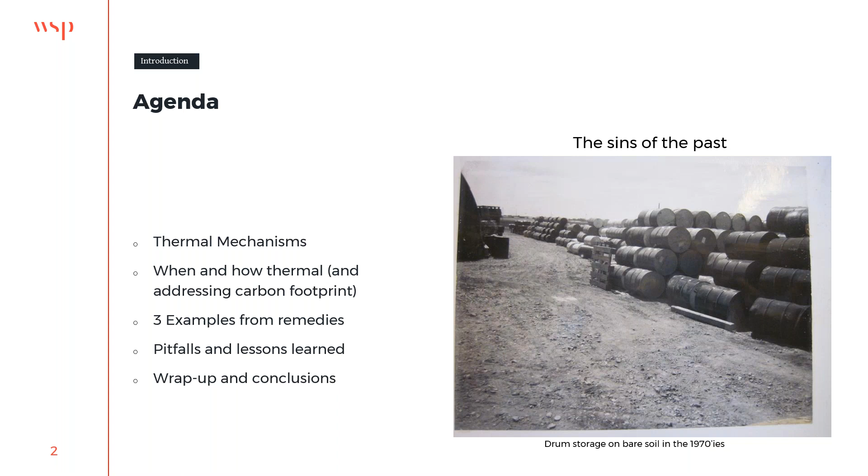What we are dealing with is what you can see to the right side here, a sins of the past. This is a drum storage on bare soil that was carried out in the 70s, and actually a thermal remedy was carried out at that particular site. In Denmark, we rely totally on groundwater for our drinking water supply, so we have relatively strict guidelines related to what we have to achieve doing the remedies. That's one of the reasons why we are using these techniques.

Just a short introduction here for those of you who are not familiar with thermal remedy. To the right we have a small sketch, and we have some kind of system that we'll go through in a minute, where we can inject energy into the soil, and then we have an extraction system that extracts vapors and liquids from there.

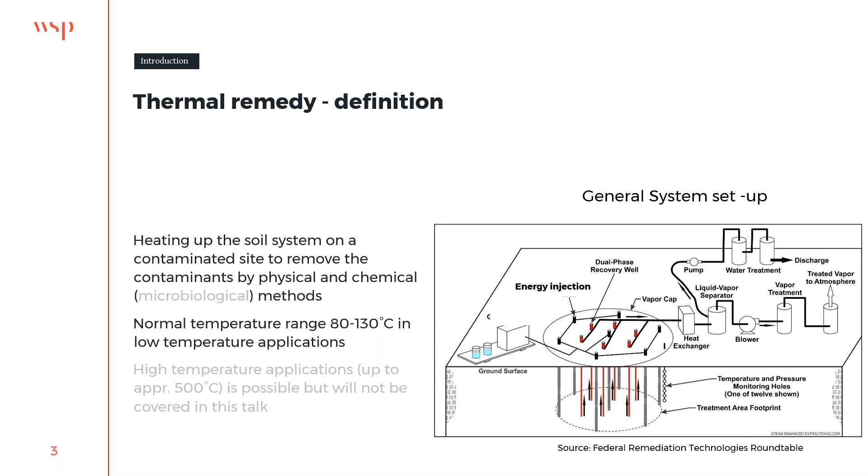That is run through a heat exchanger, as you can see, and liquid and vapor are separated from each other, and then the vapors are treated and the water is treated before discharge either into the sewer system or into the atmosphere. Normally the cleaning method we use here in Denmark is granular activated carbon in carbon vessels. The temperature regime we work at when treating chlorinated solvents is around 100 degrees C, as you will see in a short moment.

There are a lot of mechanisms that act positively when you're heating up the soil, and all of them tend to get the compounds from the sorbed or liquid phase into the gas phase, thereby making it possible to extract them with a vacuum system.

I should emphasize especially the steam drive, point number 5 on this list, because if you want to go to sub-ppm levels, you have to be sure that all the soil you're treating is boiling. The steam drive is caused by the fact that when water expands from liquid to steam it increases in volume by about 1700 times, thereby creating pathways for the gas to get up to the surface and be removed by our extraction system.

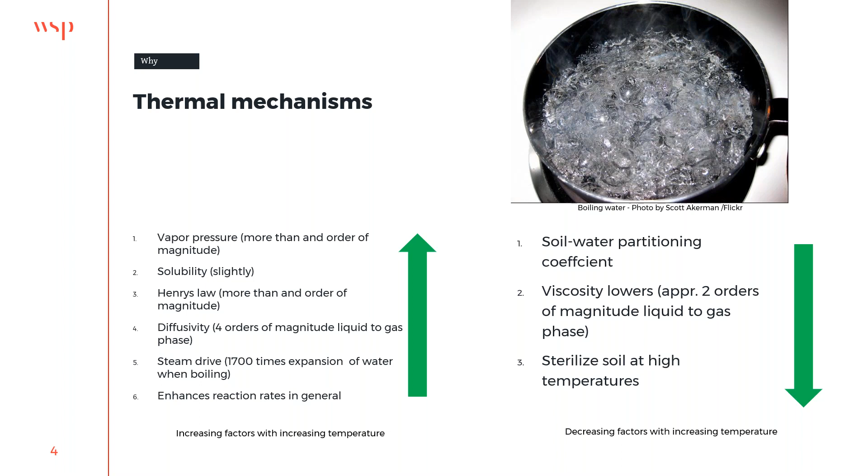So when are we using thermal? It's always only in the source zones, and here in Denmark it's relatively cheap to excavate and treat offsite. So the only places where it's economically feasible compared to other relevant techniques is typically below buildings or other valuable infrastructure, and if the contamination is deep - by that I mean more than 10 meters down into the soil.

It can be used in a lot of different settings, as I will show you some examples of in the next couple of slides, and it can be used either if there's free phase or high concentrations in the soil. It can be used both in saturated and vadose zones, and it can be used for a lot of compounds in this type of application, up to around 150 degrees boiling point.

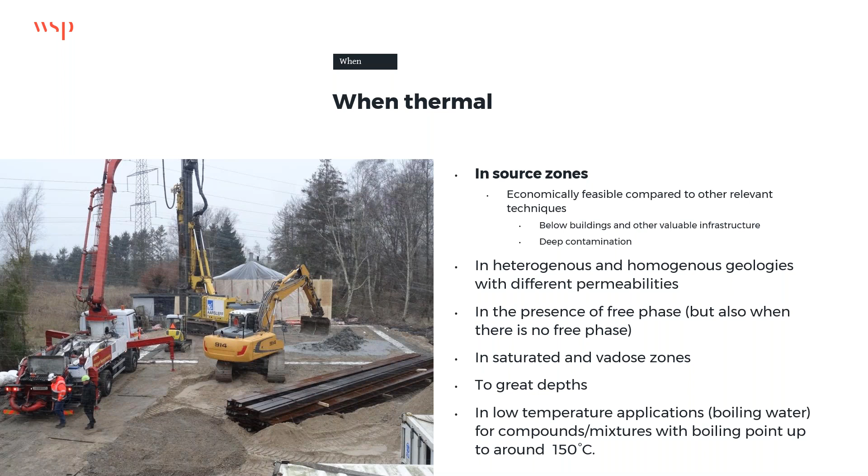The normal three different methods that we have at our hand are injection of steam, electrical resistance heating, and thermal conductive heating. I'll show you an example of each of these techniques in the remedies I'll show you in a couple of moments.

In order to be sustainable, we have to think about that, and one way is to use biogas, wind, or solar power for these energy sources. But another thing that is very important to keep in mind is that we have to reuse as much of the steel equipment that we normally use, to reduce the carbon footprint.

The little graph inserted there shows how much energy we normally have to apply from a theoretical standpoint, and if the soil is very wet, it's somewhere between 150 to 300 kilowatt hours per cubic meter.

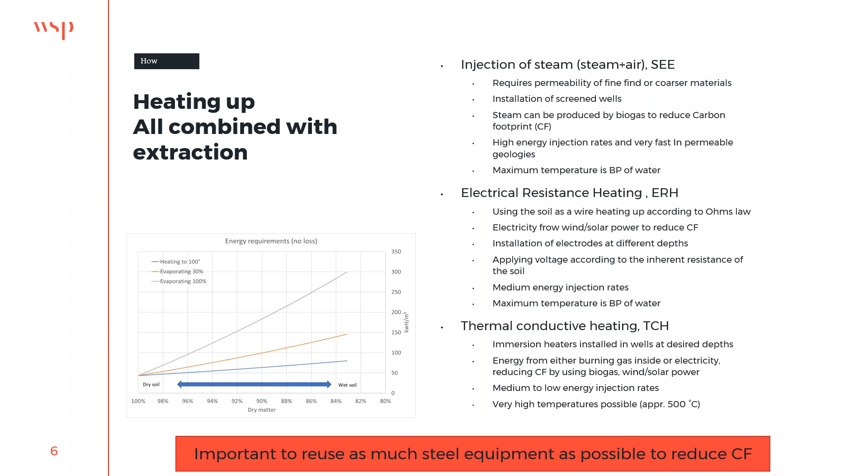Then I'll show you some examples that we have been involved in one way or another. The first one is the oldest, where we used steam enhanced extraction, and it was a contamination with PCE that originated from a former dry cleaner.

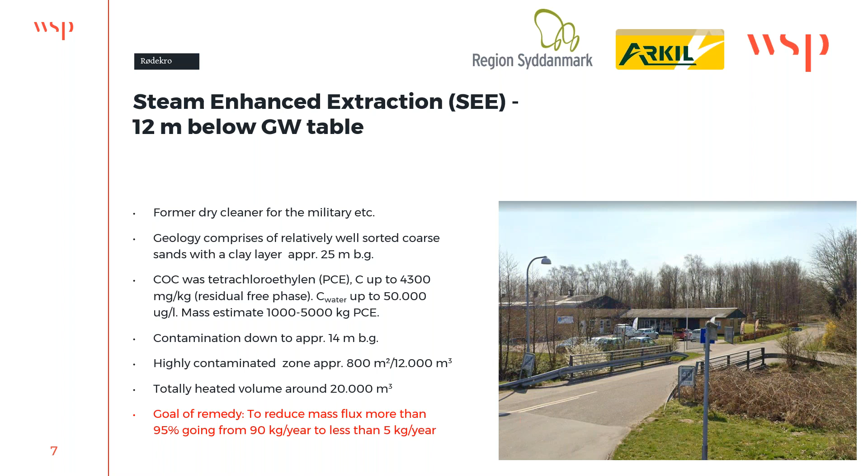At this particular site, the geology is relatively well sorted coarse sands, and the groundwater velocity was around 100 meters per year, with contamination down to approximately 14 meters below ground. The highly contaminated zone we had to treat was around 800 square meters. The goal of the remedy was to reduce the mass flux more than 95%, going from approximately 90 kilos per year to less than 5 kilos per year.

The setup at the site included 10 injection wells with steam and steam air, and a lot of wells for hydraulic control, vapor extraction, and so on. The main parameter we monitor when doing these remedies is temperature, and these are plots of the temperature wells. We also measured the extracted gas and water flow, and so on.

In this particular case, the control point was a transect placed down gradient of the contaminated site, which we sampled before doing the treatment and after, as I'll show you in some slides.

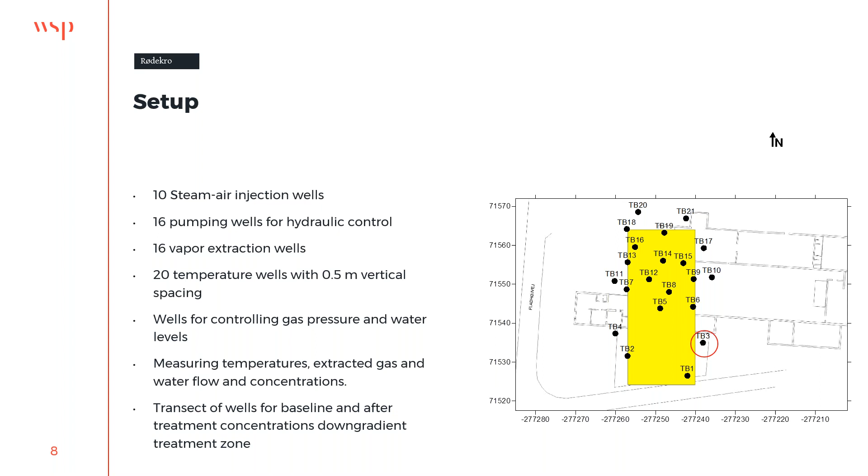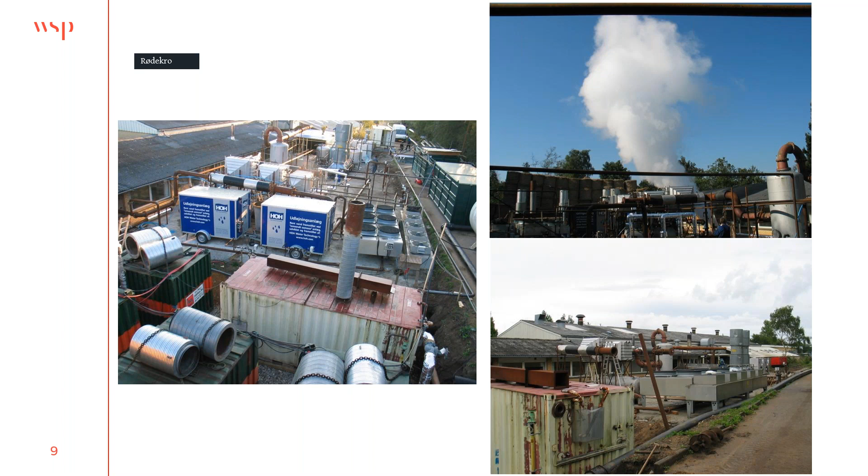Just before we go into the temperature data, here are a couple of pictures taken at the site. As you can see, the footprint of such an operation is relatively large, because you need treatment for water going into the boilers to make steam, a lot of cooling equipment, and separators and vessels for carbon, pumps, and so on. So this has a major footprint in this case.

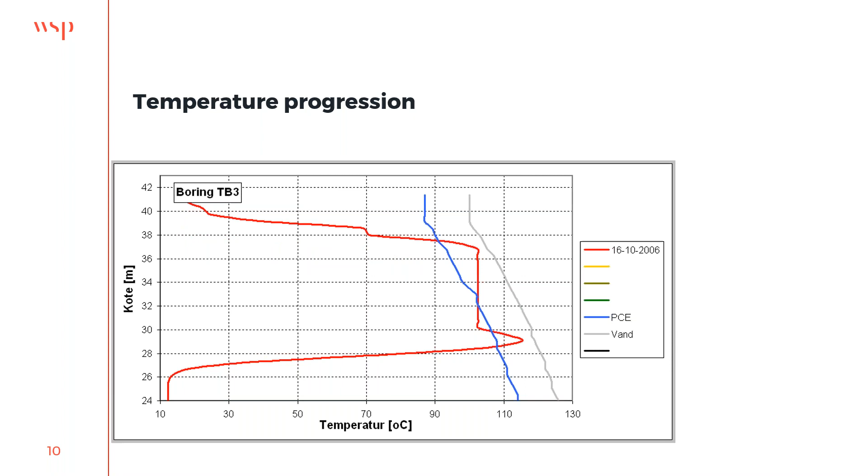As you go deeper in the groundwater, when the curve tends to the right, the boiling point increases, and at level 24 it's approximately 125 degrees. The red line is the temperature actually measured at this point on different dates as it progresses. When the temperature is above the blue line, we are sure there is no more free phase left in the soil. If you want to reach sub-ppm levels, you have to be sure the temperature is above or at the boiling point of water. As you may have seen earlier, the temperature reached that point over time.

The results at this site were that we removed somewhere between 1.5 and 2 tons of chlorinated solvents, depending a little on the method of calculation used. But what you should take special note of is how short the heating period was—25 days—due to the fact that we can inject a lot of energy into the soil using steam. We achieved the mass flux goal after 6 months.

The interesting thing is that we came back some years later, in 2014, and the mass flux reduction was even higher due to the fact that the rest of the contamination was almost gone. As you can see, it was 99% or maybe even higher reduction.

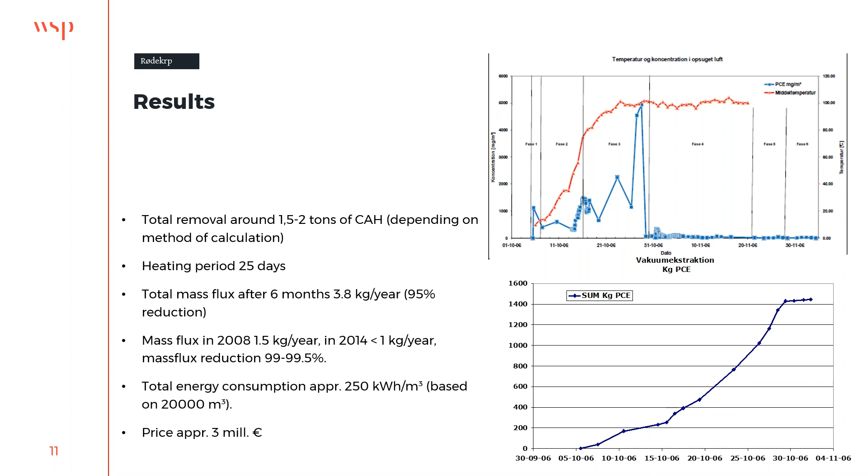This technique is rather violent, and you will see very high concentrations when the temperature increases to around 100 degrees, as you can see in the upper graph there.

This is a setup in an unsaturated glacial till. Here the contaminant was also PCE, originating from fur treatment in the building you can see in front of the church in this old picture. The installation was around 147 heater wells, much more than you saw before on the other site. So we have a much denser network of injection points, due to the fact that the amount of energy we can inject using this technique is much less per well.

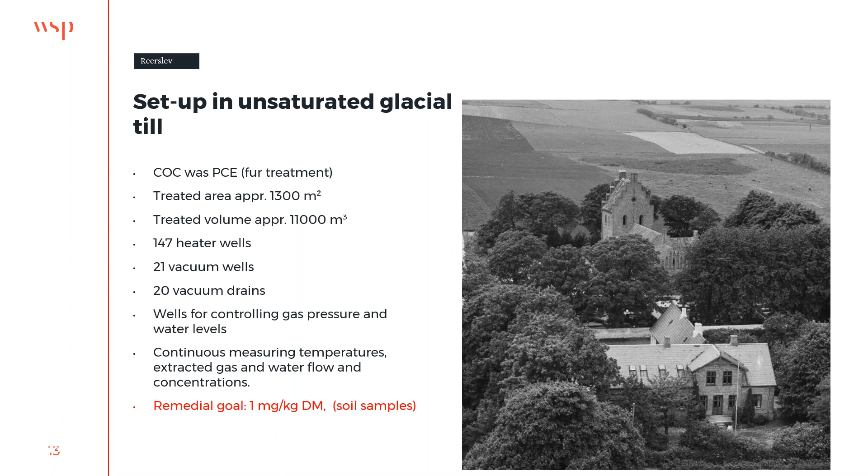At this particular case, they did a lot of continuous measurement of temperatures. It was carried out approximately 7-8 years later than the other one I showed you before, so the technology developed during that period. The remedial goal here was to clean up to 1 milligram per kilo in the soil, based on soil samples. So that was another way to do it.

The results: they removed in fact 2.5 tons of PCE. And as you can see, the heating time was much longer, and it's a more gentle curve that we see in the concentration in the upper part of the graph. The heating time at that particular site was 169 days.

In the bottom right, you can see the values taken from the soil samples. The red dots are the baseline before the remedy, the blue dots were taken just after the remedy was finished, and the green dots were taken approximately 2 years after the treatment. The criteria is the dimmed gray line, and as you can see, all sample points obey the criteria.

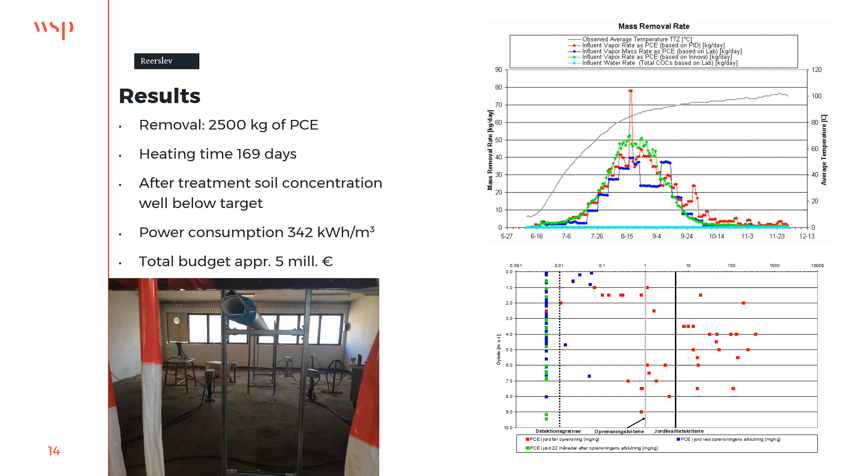The insert picture there is just another example, the same as you saw on the front page. In this particular case, it was also the groundwater that was the reason why we did the remedy, but there was a residential building, and we solved a vapor intrusion problem there too at that particular site.

The last example I'm going to show you is a remedy that was finished last year, and at that particular site we used electrical resistance heating. It was also carried out for the capital region of Denmark, and Geo was the contractor out there.

This was a setup performed in a saturated glacial till, whereas the other one I showed you before was unsaturated. It was TCE that was the contaminant of concern, originating from the military - it's actually an old Air Force base. The area treated was relatively small, around 500 to 600 square meters, and we had 53 combined heater extraction wells there. So it's more or less comparable to what you saw before in the density of wells for injection of heat.

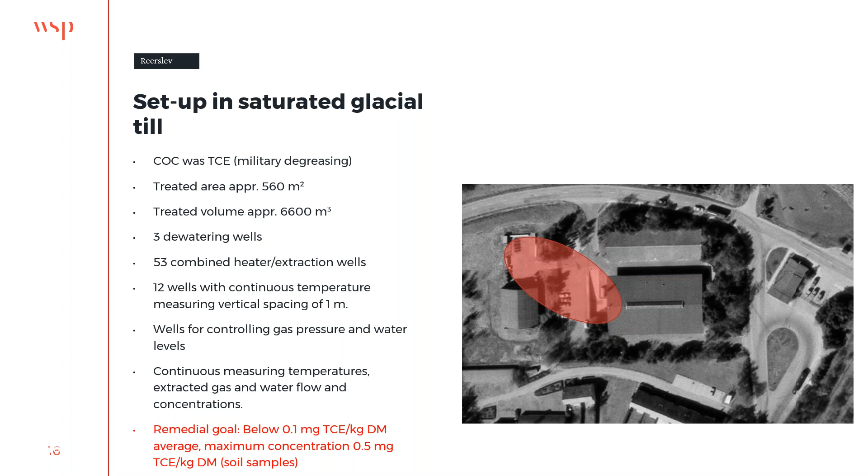The remedial goal here was to reach 0.1 milligram per kilo on average, with no sample above 0.5 milligram per kilo of TCE. At this site, we had continuous measurement of the extracted gas using gas chromatography, which is a very precise way to measure.

The outcome of this was removal of more than 200 kilos of chlorinated solvents, of which 180 kilos were TCE. That was far more than expected based on the investigation, and that's a common thing we observe in a lot of these remedies—the mass is bigger than expected. This took a long time, 300 days in fact, due to problems with cold water coming into the area, and the power supply being a little too little, because we couldn't keep up the temperatures all the time in all the places.

The average concentration was met, but there were some small spots that didn't meet the maximum concentration required. So it was still a success, and we made a risk assessment based on what was actually found, and the site got closure there too.

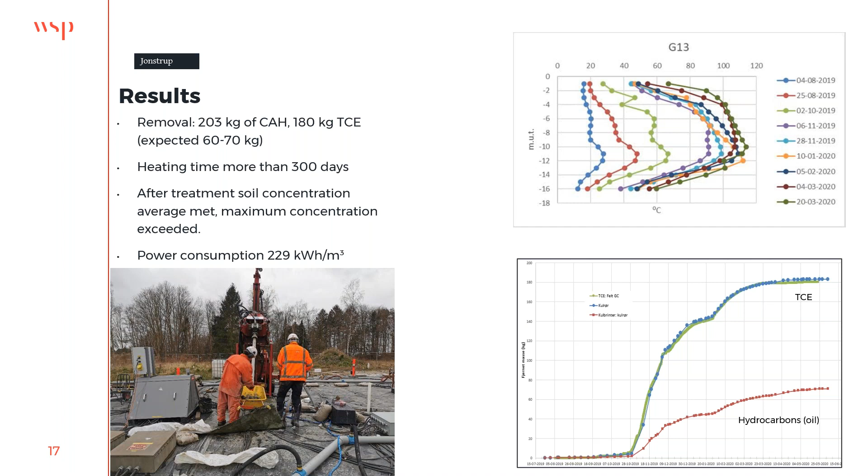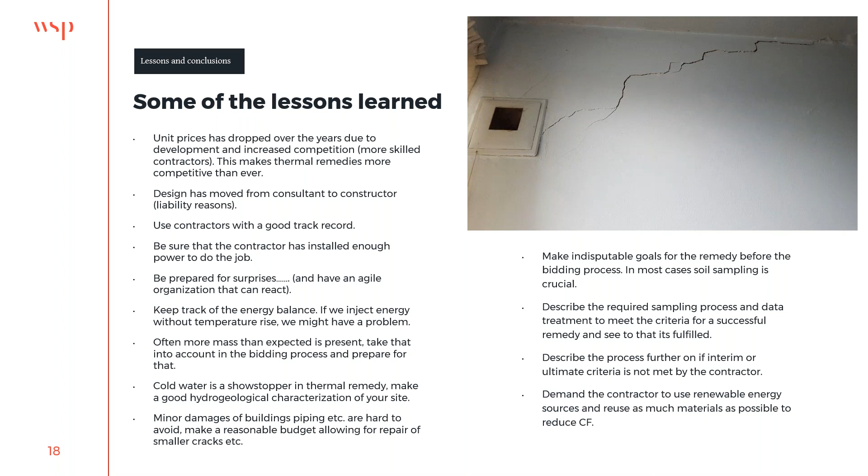To wrap up with some conclusions: we have had thermal remedies in Denmark for more than two decades now, and they have a very good track record. Nowadays we are able to reach 0.1 milligram per kilo for the chlorinated solvents in a lot of situations, if that's what we want, and that covers most geologies. We can use all three techniques; they each have their hotspot, so to say, so you just have to apply them depending on the geology.

Also the sustainability is better than ever, I guess, because there's awareness of that. And as I said, always be prepared for surprises. That means you have to have an agile organization that includes both the client, the consultant side, and the contractor. Challenges will occur, and we have to deal with them relatively fast because we are spending time and money relatively fast when doing these kinds of remedies.

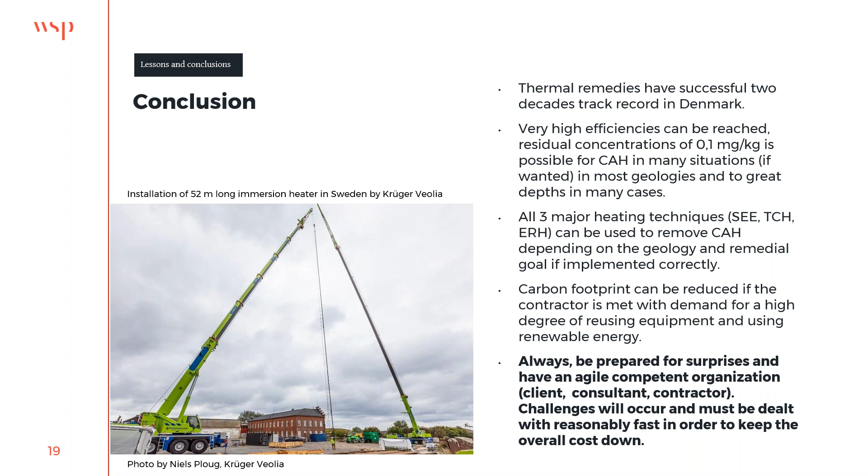And with that, I would conclude and thank you for your attention, and take questions.